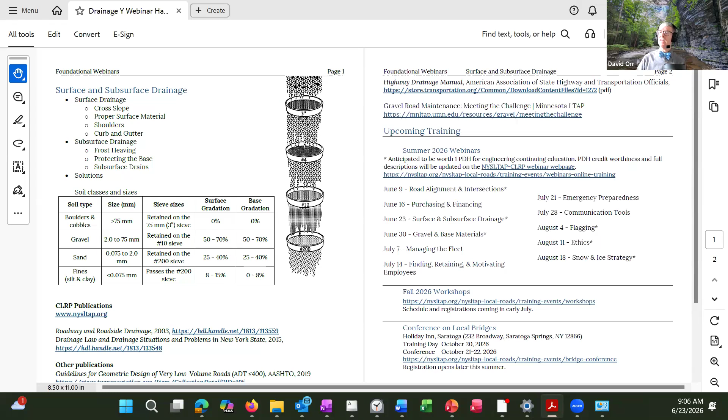But we're trying to maintain roads and streets, and to do that we've got to get rid of the excess water. And that excess water can come in lots of different ways, and worse, it can stay there. So what we're going to talk about today is hopefully solving that problem.

The point is, if you've got excess water due to precipitation of almost any type, you're going to have problems. So you're trying to get rid of the excess water, okay? When all this snow and ice melts, you've got a lot of water to deal with, or the rain we got - we got some great rain yesterday because it was nice and slow and all that fun stuff.

But so we'll go from there. Now, when we have the whole day together, we'll get into a lot more detail. We'll talk about the roadway, the roadside, culverts, erosion, and ditches. We have to break these things up with the webinars - we know the mind can absorb what the seat can endure, so we typically keep them to 1 hour.

So we're going to focus today on the surface water and the subsurface water - how do we get that water out of the roadway if it gets in there, and how do we keep it from getting in there if we can? Hopefully by the end of this hour, you haven't totally graduated, but you've at least got a sense of what kind of work we can do to make drainage better.

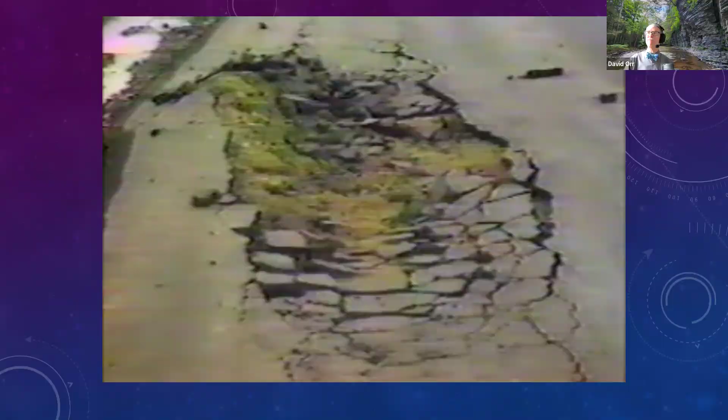So we're going to start by looking at the surface of the roadway. If you look at this particular roadway, this had been bladed or dragged to smooth it up, but they probably were going a little fast with the grader. But the more critical problem is it created a flat spot. You absolutely don't want a flat spot in your roadway, because that water -- the best case scenario is it evaporates, but more likely it slowly permeates into the gravel and saturates it and makes it soft. So you really want to have a cross slope on your roadway.

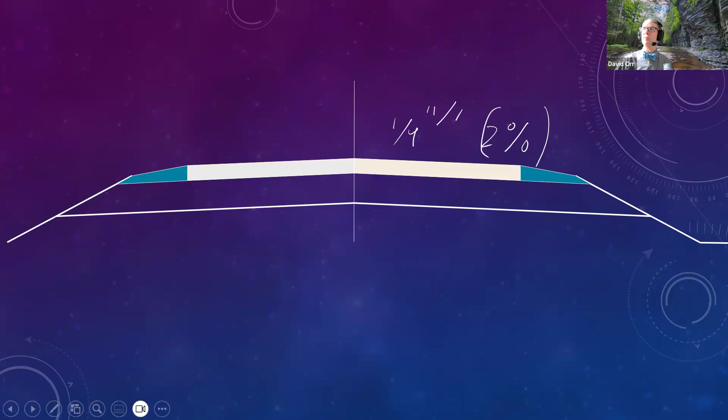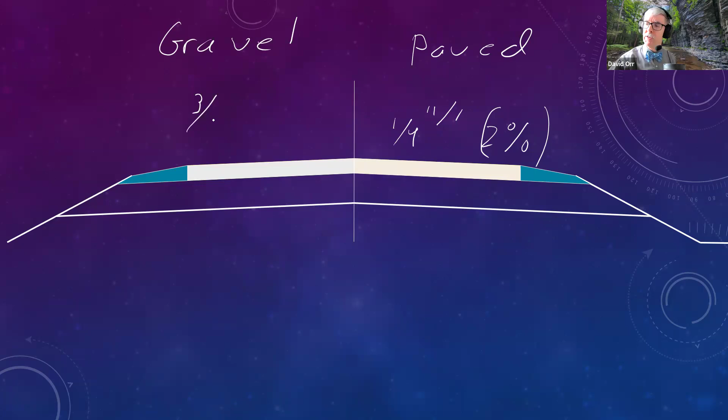That's absolutely key. So if you've got a paved roadway, you want about a quarter inch per foot, which, by the way, is also 2%. Yes, I know they're not exactly the same, but they're so close, don't worry about it. That helps get the water off the roadway. If you've got a gravel road -- I'll even write the word gravel, you'll have to deal with my handwriting and the pen tablet being slow -- if you've got a gravel roadway, it needs to be steeper. It was research that was done here back in the 50s, and typically, if it's a flat stretch of highway, fairly flat, you might need 6% to get a crown.

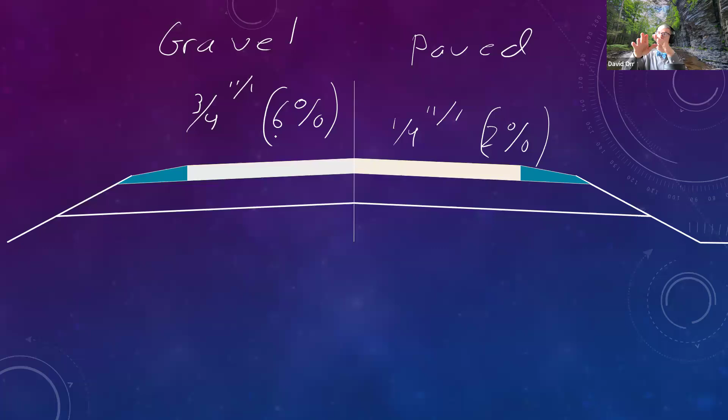In fact, the crown is more critical in a gravel roadway than on a paved one because the surface is more permeable and can be disturbed by all the vehicles going along.

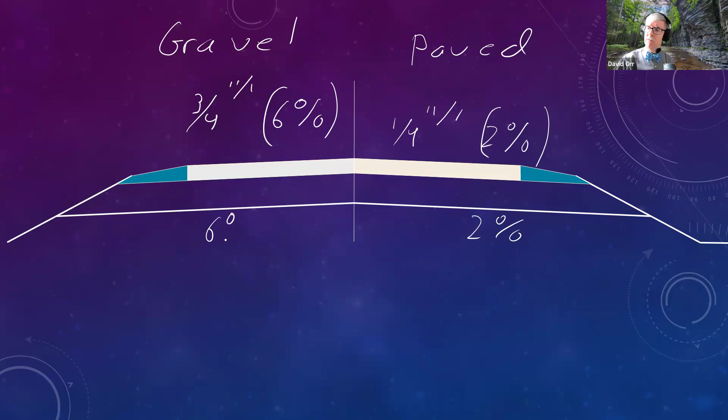If you re-put in a culvert or rebuild a stretch of roadway, what should the cross slope be on the lower layers? Take your upper layer and match it. If it's going to be paved after you're done, put at least 2% in. If it's going to be gravel, put in 6% grades. In other words, do the grading work at the sub-base or subgrade level. It's actually cheaper and easier than placing the other layers since they're consistent thickness, but make sure they drain all the way out.

So if you go down a gravel roadway and notice these big rounded potholes, they're caused by a flat spot. I live on a gravel roadway, and they put in some pavement at one end, creating a flat spot. Now it's just always potholes. People who maintain it throw some gravel in, but it goes right back to potholes. Make sure you get a cross slope.

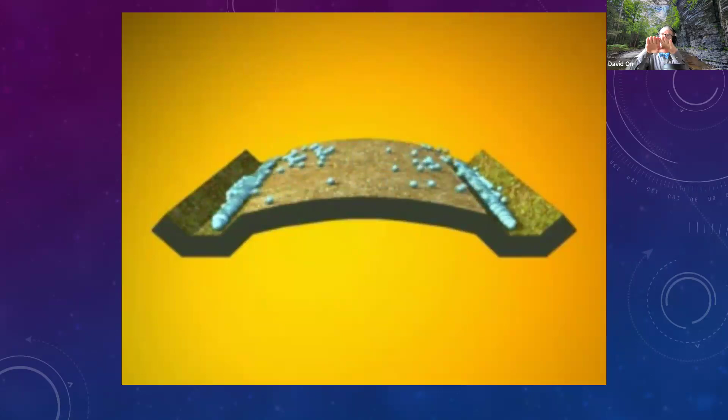We'll see if it plays today. I may stop this one after just a minute, but I'll cut the sound for the sake of argument. This thing talks about the quality of the gravel, roadway shape, and the fact that you've got to get the water off a roadway. It's even more critical on a gravel roadway than a paved one, but it's true on any roadway. You get a flat spot, and actually one thing I don't like about this video is it shows a parabolic surface. If you do that with a gravel roadway, that little flat section with a parabolic shape in the middle actually creates problems. And yes, as they say, it's actually a safety issue in a lot of ways if you get a flat spot.

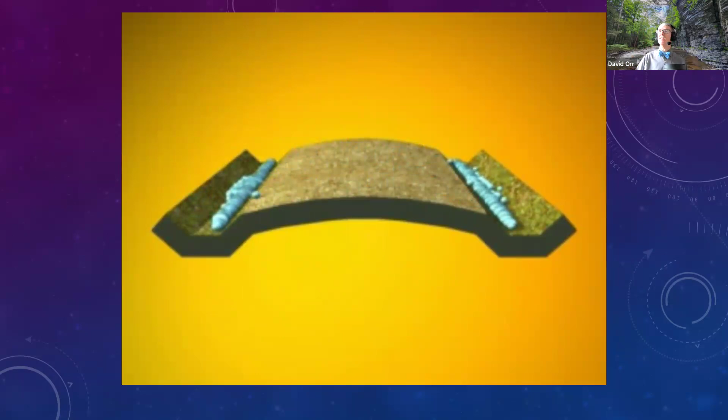And they like a minimum of 4%, but I found, especially with the glacial tills we have, we want to be a little bit more than that on a flat stretch of highway.

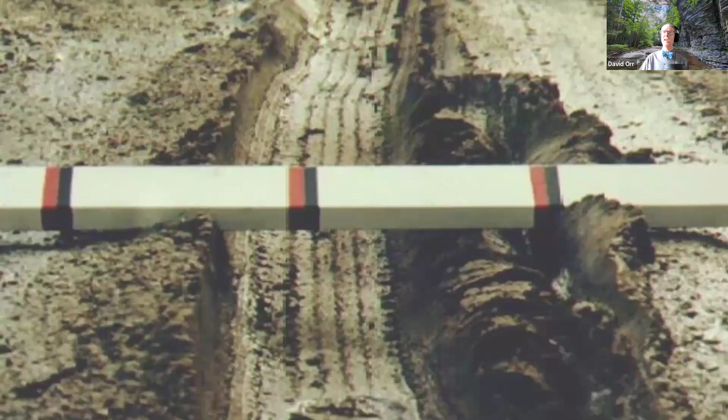Now, here's a case where you could have better cross slope, and no, the cross slope's not very good here, but you've also got to have the right material in the gravel itself. The quality of the material here isn't very good, and here's a close-up of the rut in the lower left corner. You can see it's got nothing going on, no rocks of any size. The largest I found when I put my hand in it was about a quarter of an inch, so it's not very good.

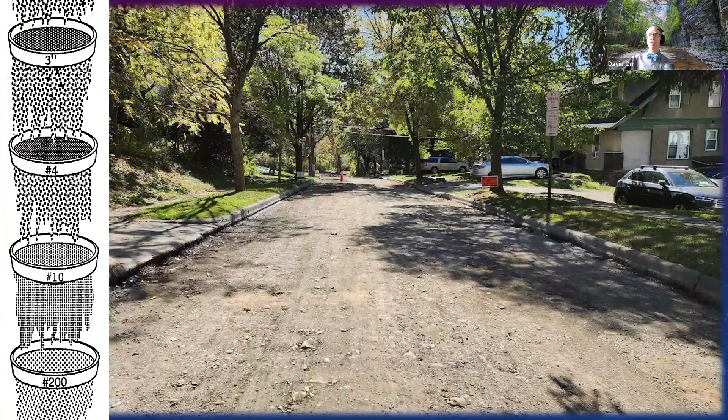Now, before we go too far and talk about what makes a good gravel, we're going to do a lot more on this at next week's webinar, but we're talking about the drainage issues right now. You get a roadway, you're rebuilding it, you've milled off all the surface, and you've got this exposed material.

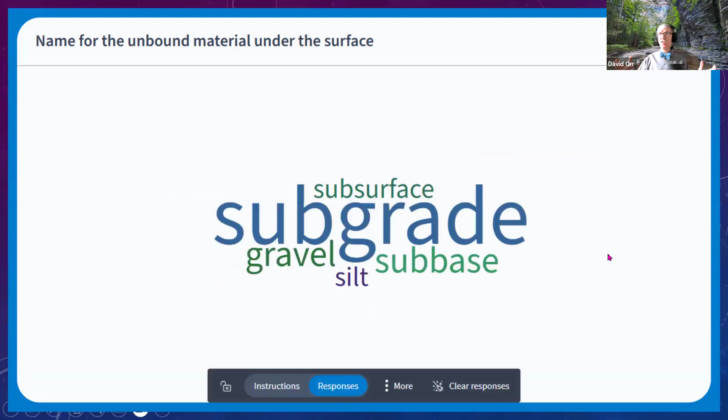So the subgrade is under the roadway, but the material under the pavements is base, subbase, gravel. Now, sometimes when I've asked this question, people call it crusher run, bank run, fill, or base. The point is, whatever it is, it's a mixture of materials we bring in that's part of the road structure.

That's actually a very important part of the road structure. We've got the subgrade, which is the material in the area after we've stripped off the organics - that's what we build the road on. Then we usually have an unbound layer, either base or subbase, which could be a gravel mix, crusher run mix, different materials. Eventually we'll have bound layers above that. Depending how thick your pavement is, you might have a bound base layer or an unbound base layer. Keep these things in mind when we talk about drainage.

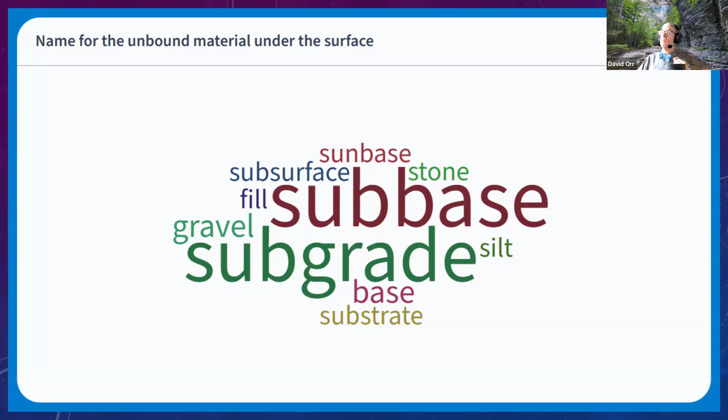But whatever you've got, it turns out some of the same research that talked about the gravel cross slope also looked at the quality of the gravel. Gravel is a mixture of particles of different sizes. It's got gravel-sized particles - essentially pebble-sized and larger. If you want the exact sizes, you can look at some of the handouts. Things smaller than that, down to what you can barely see, we call sand.

Sand is really pretty good for drainage, though the finer sands can have issues. Finally, you get things smaller than 75 microns, or the number 200 sieve - we call those fines, or silt and clay. Here's the key: better quality material has less silt and clay. If we had 2 hours together, we could talk about exactly why, but it comes down to silt and clay holding onto too much water and not letting it through fast enough. There's also a third item called capillarity, which we'll show in just a couple minutes. So you don't want much silt and clay.

But if you've got a gravel surface - and many of you said you do deal with gravel surfaces - you need that silt and clay to bind the gravel together. It's your binder, replacing the asphalt in an asphalt-bound roadway or cement in a concrete surface. So you need a little silt and clay, but not so much it gets soft in the spring. The exact proportions are in the handout, but essentially you need at least 50% gravel, about 25 to 40% sand, and fines content no more than 8%. I'll talk about why in a minute, and a lot more next week.

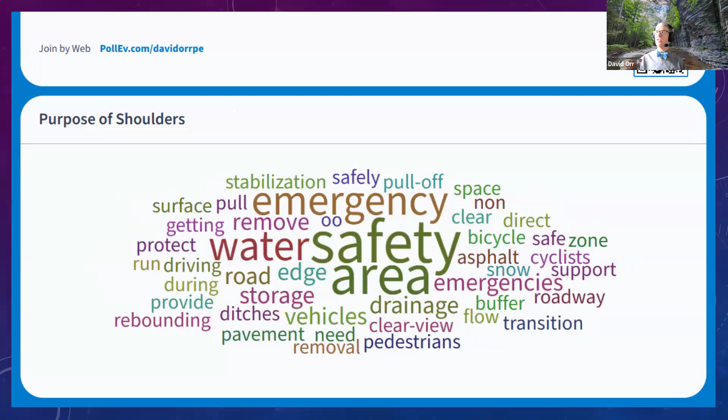It takes care of the water, moves it off the roadway down to the side. It stabilizes the pavement, literally supports it if you've got a compacted shoulder, and helps keep it in. You've all seen cracking on the edge of a roadway where you didn't have good shoulders. That round, D-shaped or edge cracking is caused by lack of lateral support.

And then of course, you're going to have snow and ice issues. You want to be able to store some snow.

So we really need to get the water off the roadway, we need good shoulders. Otherwise we might as well have some ice skaters at night when it refreezes.

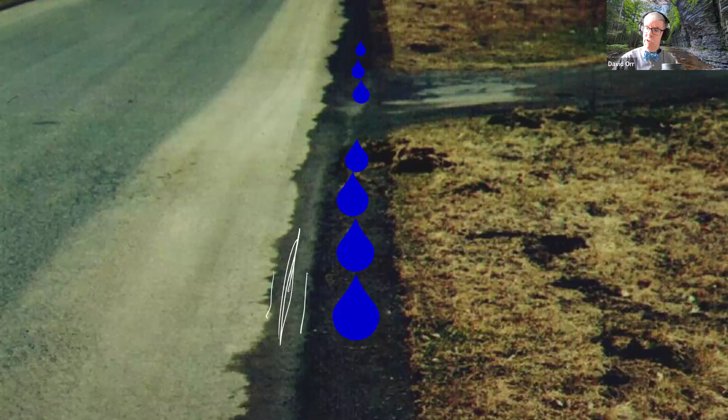That's what happened here—the snowplow doesn't go out far enough, and actually created a spot where the water can get back into the roadway. You can see the edge of the pavement is saturated, and if you look carefully, it's already starting to crack. And of course, that debris thrown out by the plow has to be cleaned up, which leads to phone calls and all that fun stuff.

So take care of the water. Now, many of you showed that you were from urban areas, so you're probably thinking shoulders don't apply—but actually, curb to curb, they do almost exactly the same things.

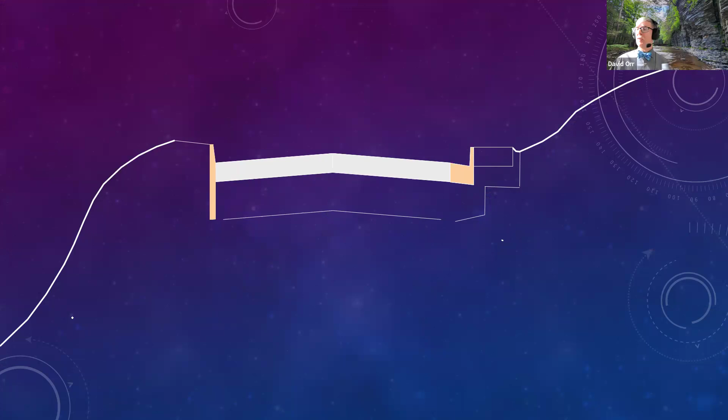They provide lateral support—if the curb has been placed properly, it supports the pavement. And it carries the water, usually through some kind of drainage system, either catch basins in the roadway or side drains, taking the water to your storm sewer system underneath. So it does very similar things.

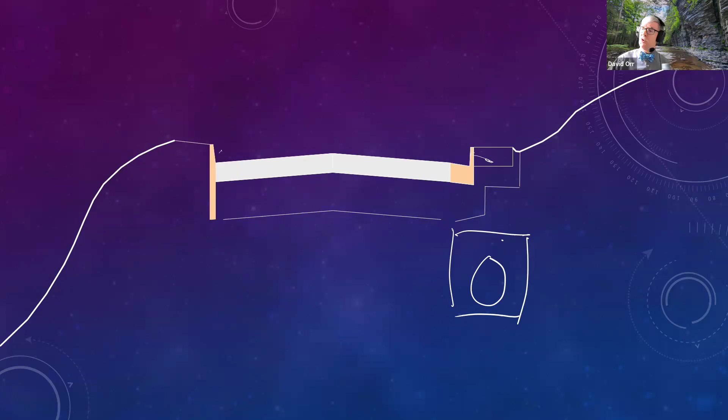It's also a bit of a safety issue. If your curb height is set properly, it provides some safety at relatively low speeds, which is why we typically don't use high curbs on high-speed roadways—hitting one at high speed reverses the safety benefit and actually makes it more dangerous.

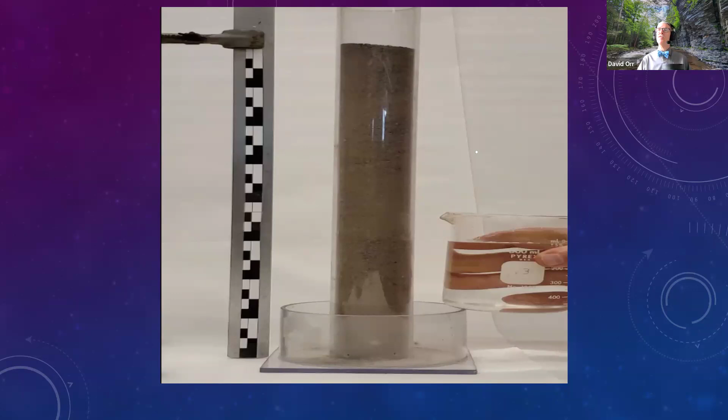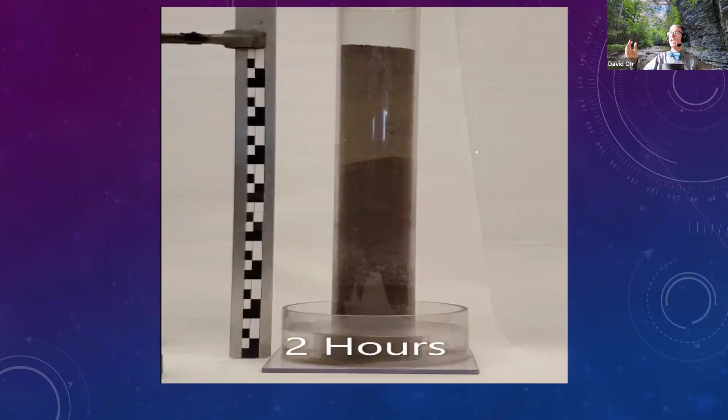We do a longer demo in class, but here's a video. We've got a capillary tube with a reservoir at the bottom, and Nick, who made the video, poured water into the reservoir. There are little holes to let the water in, and you can actually see the water rising up. After 1 hour, it's already up a good 6-7 inches above the water table. So if you've got a water table near the surface, you can literally pull water right into your roadway. After a couple of hours, we're talking about 10 inches or so. If you waited all day, the top of this column would be wet. And that's with sand - if you have silt and clay, it's even higher.

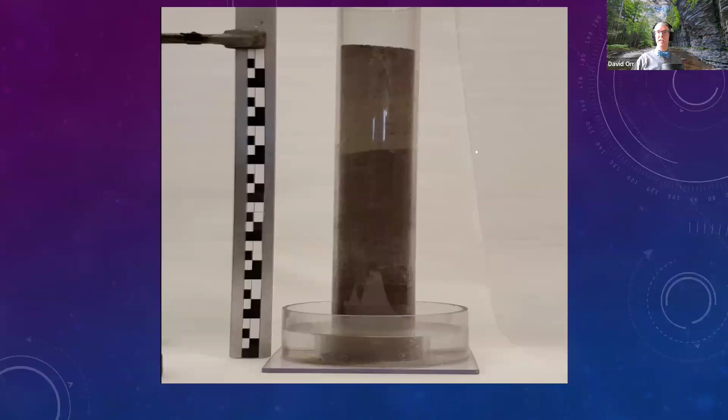And why is this a problem? It has to do with winter. We're going to be brave today and try more videos than I normally do. This is a freezing cabinet, part of a video available on the web called Frost Action in Soils. There's a newer version out there, but the old version works just fine - in fact the video I'll show you is from the old version, because it's such a good video even though it's got old technology in it. The top of the cabinet is below freezing, the bottom is above freezing, but there's a source of water.

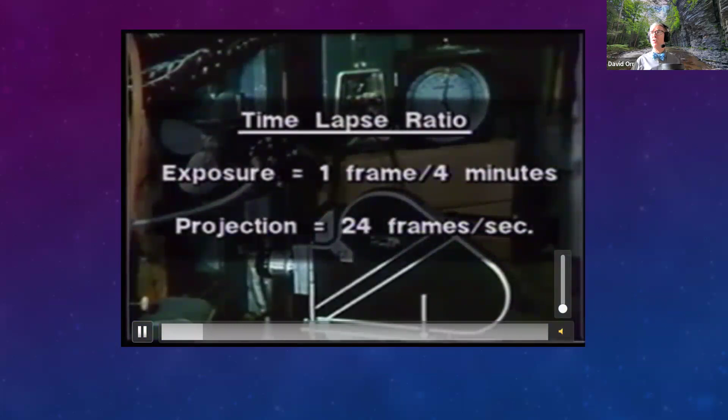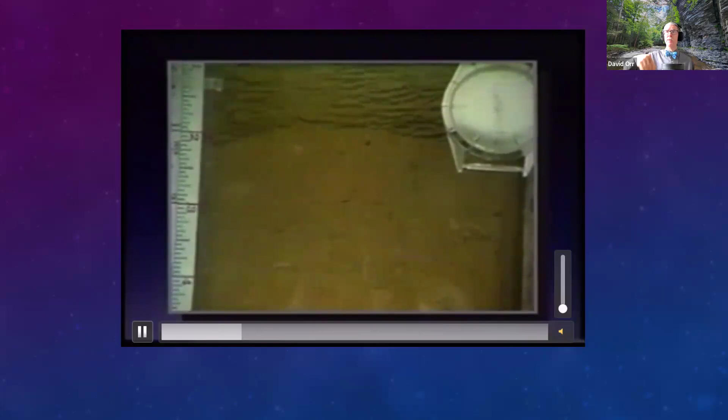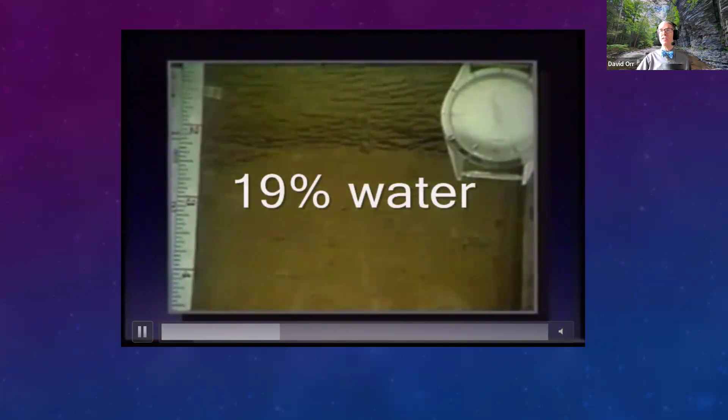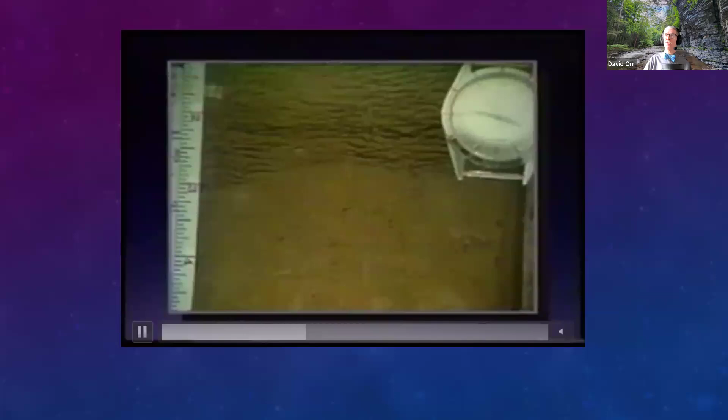This particular sample is silt. It started at 19% water content, and water gets pulled up further. There's about 19% water to start with, but additional water is brought up by capillarity through the soil. As that soil freezes, it picks the roadway up and you get ice lenses. Those ice lenses are hard to stop because the depth of frost can be 2, 3, 4 feet - heck, more in parts of the Adirondacks.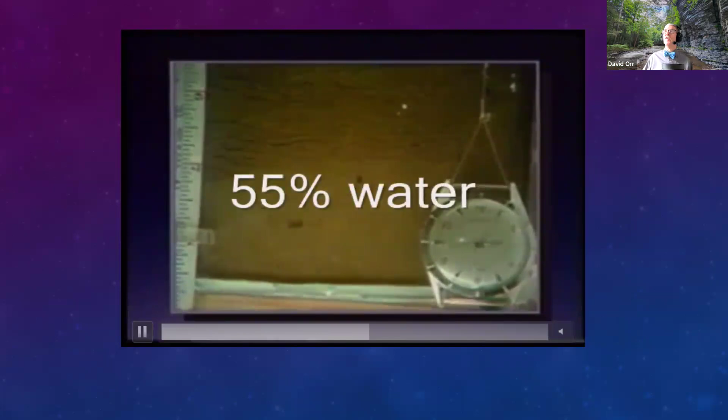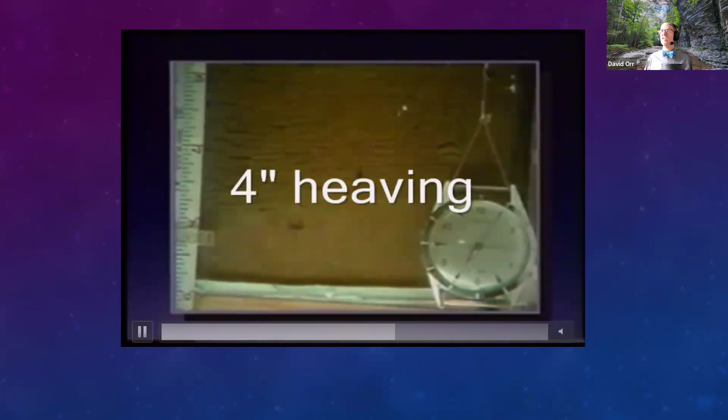You get down to the bottom, started with 19% water content. By the time they got done with this little experiment, it was 55% - over a 35% increase. But even worse, the sample height went from 6 inches to 10 inches. That's a 4-inch heave, a tremendously bad heaving.

So these are things to keep in mind as you're trying to take care of that water. You want to use material that can handle the fact that it's going to freeze. You don't want it to have frost susceptibility, to hold the water. Here's a picture of a lens with 3/4 inch thick ice, and that's pure ice. And that ice is not the water that was already there - it's water that was pulled up by capillarity.

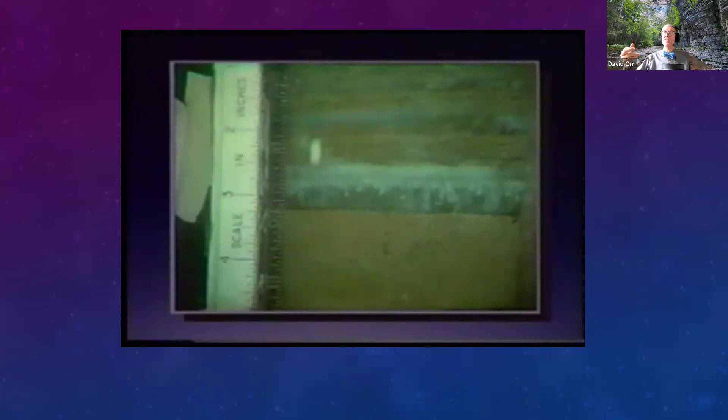Now you could just put up a sign that says frost heaves. That would possibly work, but that's not really the best method to solve the problem. And of course, if the heaving is differential, what you get is a situation where part of the ground moves and other parts don't. Culverts are really notorious for this.

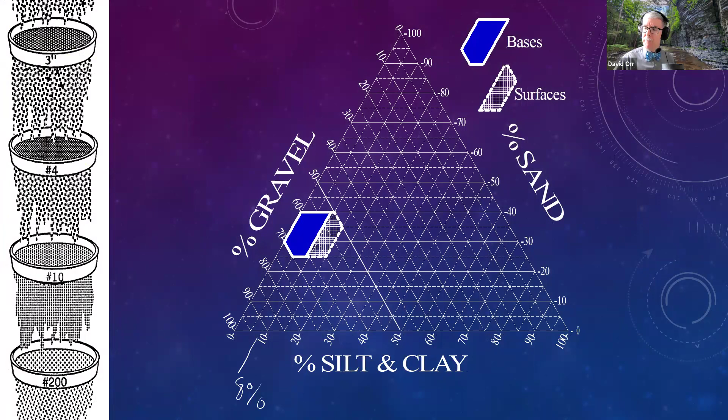So let's look back at our little chart. That's where those lines come into play. That line at 8% fines content we found is the line where the frost susceptibility starts to come into play. So you want your fines content to be less than 8% to reduce the frost issues that you have to deal with, and it will drain better.

In fact, truth be told, if you're on a really thin surfaced roadway, you actually need better gravel than someone with a thick surfaced roadway, because the consequences of the excess water will make your problems worse.

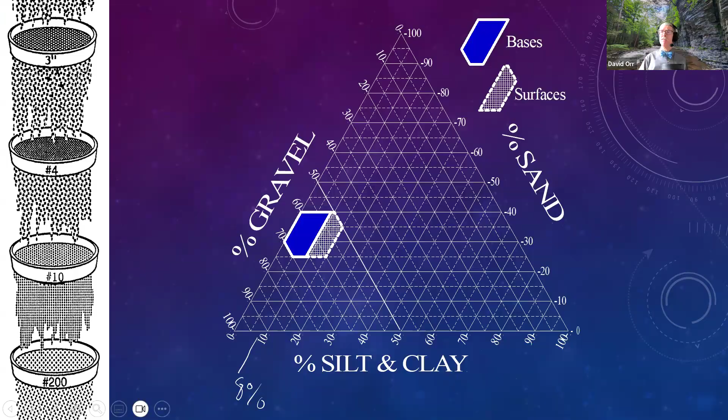It's either trapped in there, coming up via capillarity, could be a spring in the area. You're going down a hill, so it could be that. But don't pour your money into the surface in this case - think about the quality of the material underneath.

Now, good news I have for you, by the way, is in the middle of the winter, when the pavement is frozen, it's as strong as it can possibly be. That's really cool, that's great news, right? We're in good shape. However, the problem is, of course, it thaws a little bit from the bottom, but a lot from the top, mainly in the middle where the sun hits the black surface on a paved roadway.

And of course, we have shoulder material that may be of different quality, and so we get a thawing in the middle. And of course, all that extra water - remember, 18, 19% water to 55% - all that water doesn't have anywhere to go, and so you get a big water bed and a bathtub.

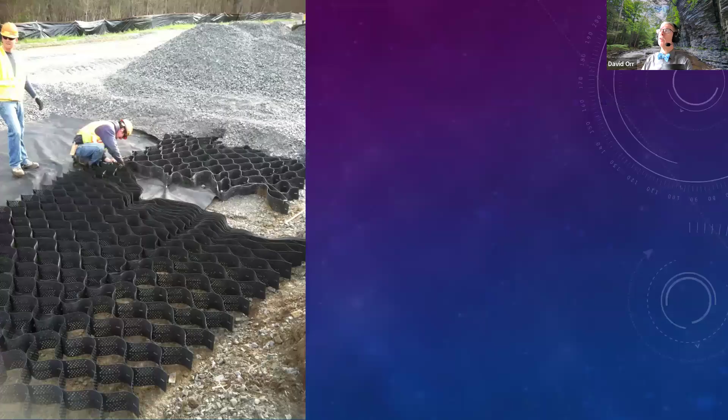Now, if you're in a really soft, swampy area, you might think about putting down fabrics or geocells or other tools to help spread the load out over a really soft subgrade. But again, make sure you understand what these things do for you and don't do for you, and what is the effect of excess water.

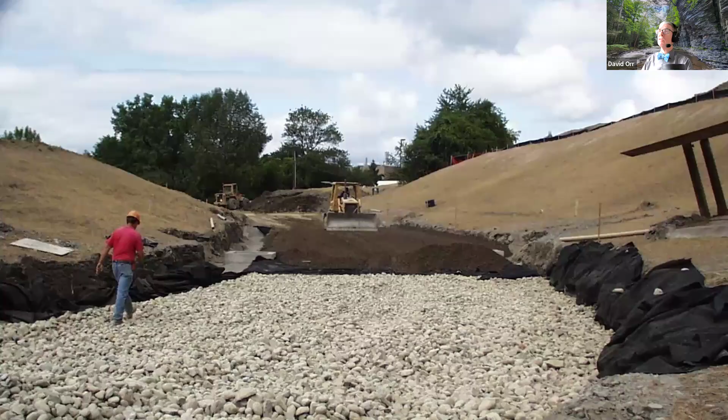In this particular case, all those rounded rocks, you can't compact them. And if you can't compact them, traffic will eventually do it, but it takes a while, and you can get rutting and other kinds of problems.

So think about the subsurface water, try to keep it out of the roadway. And if you can't get it out, think about subsurface drains and blankets and stuff like that to take it away. If we had a whole workshop, we could talk about ways to do that.

Now, I'm a big fan of fabrics, but make sure you're using the right fabric and understand the limitations. Not every fabric works in every situation. And you don't want the fabric to fail prematurely because now you've got to dig it back up, and fabric does not dig up very well. So try to use it judiciously where it's needed.

If you've got excess water in the spring, short term you can think about putting in subsurface drains. Long term, I'd think about free draining layers. Make sure the base material is good quality - we'll talk more about that next week in our webinar on base and gravel materials. But you want to get that water away from the roadway and reduce the amount of time it sits there causing your pavement to be weak.

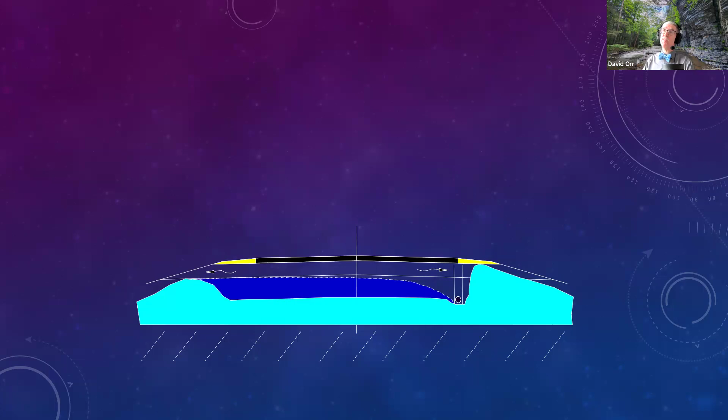One of the things we see around New York State is most of our roads are pretty old. Here's a picture from the 1908 Book of Roads from the Department of Public Works of New York, describing this as a main east-west highway on Long Island. Back then it would have been either what we today call the Sunrise Highway or the Jericho Turnpike.

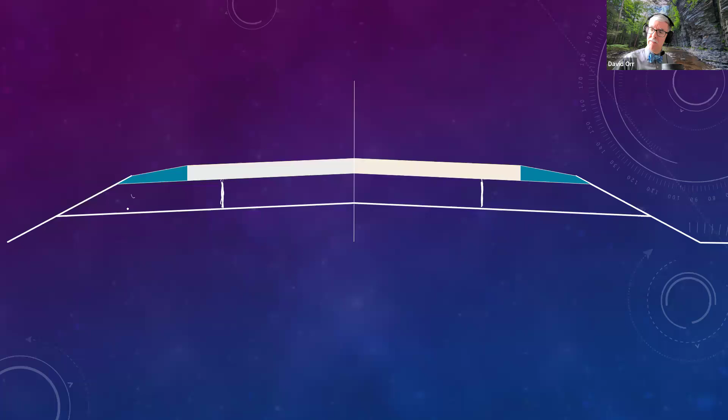They're a little wider than that today. So look at your roadway and think about it - if you've got a roadway with, say, 20 feet of pavement, but the original roadway was only 16 feet, you might have only had good material under the 16 feet. But when they widened it by paving wider, chip sealing wider, and eventually putting cold mix or hot mix on it, the material out here is not good material as a base.

It might be okay as backfill material, but it's trapping water. So all the water can't get out - it's trapped. Even if I put a subsurface drain in here, it doesn't matter. It's not going to drain water out of this base, or at least it'll do it very slowly. So you can have excess water.

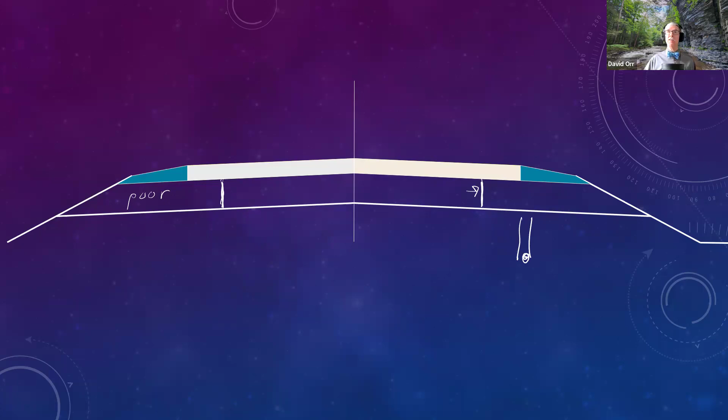How do I know that? Well, look at the roadway - the roadway will tell you. A test pit would be great, but if you can't do that, just look at the roadway. Here's a classic example of this.

Here's a roadway that was not bad, probably had pretty good gravel or base material underneath the main road, but the road wasn't that wide. It was wide enough for a couple of buggies and early cars - didn't need to have that much width. But as we widened it to handle trucks, farming equipment, and industrial equipment, now we've widened that roadway out beyond its structural support.

And you can put a subsurface drain in here. You spend the money and effort to put a subsurface drain over on this edge or the upper edge because you see there's standing water there, but it's not going to pull any water in. You're going to spend a lot of money and not fix the problem.

You've got to get the water away. You're going to have to reconstruct this - probably, as a minimum, box out these whole areas to fix it right. Now, we are big fans of drains, as I said.

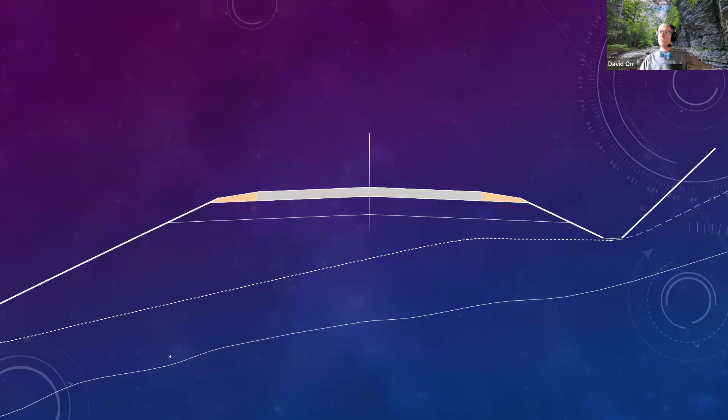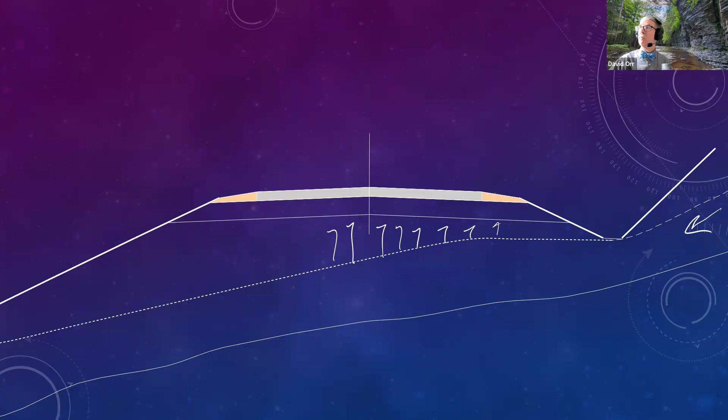They work. They can intercept the water before it gets to the roadway, so you've got water coming in from the side hill. This is a very common problem - we don't live in a flat state. If there's any capillarity, that water can literally be pulled right up into your roadway. A ditch actually helps a little bit, but you don't want to make it too deep because of safety issues. So maybe you come in here and stick a subsurface drain in.

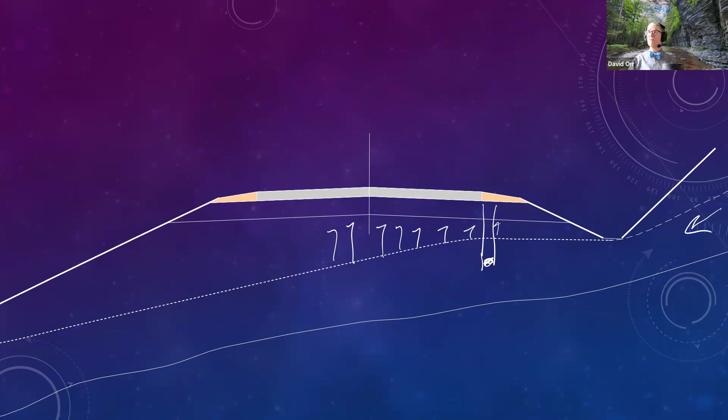That can keep the water from getting to your roadway. And it'd be nice if you could get to an impervious layer, but I'm a realist. I know that's not always possible because you really probably want to go down only 2, 3, or 4 feet at the most. And of course, you have to have a place to take this water.

If your ditch is here and your subsurface drain is down below that, you're going to have to take your subsurface drain across the roadway and out. Actually, it's not that steep. Let's go over here. There we go.

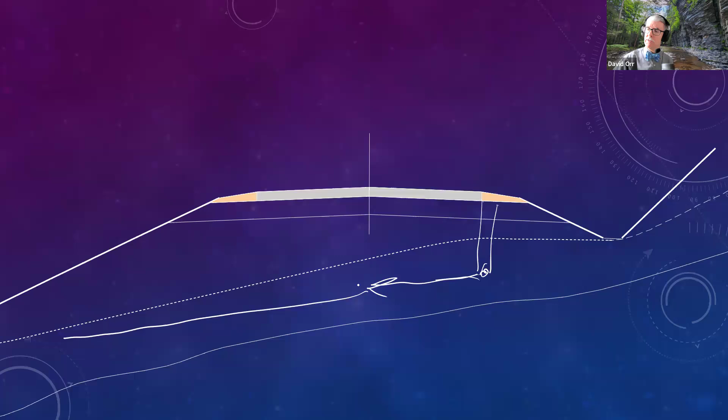So keep that in mind. You've got to be able to get it out. If you have a storm sewer system, because it's a curbed area, you actually could feed it into the storm sewer system. You have to have positive drainage to let the water out of the system.

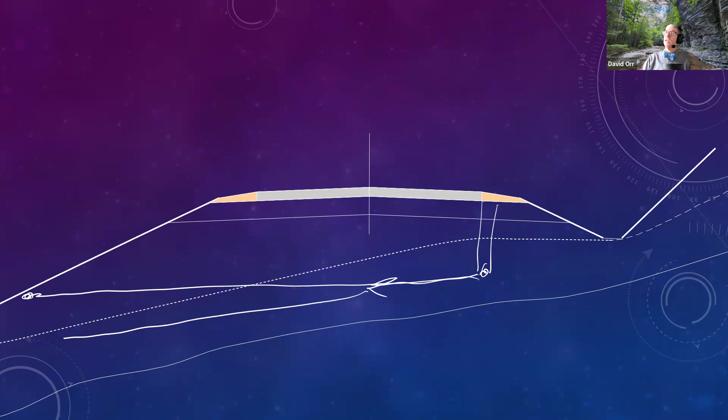Remember, the water that comes out is only the water that would come out via gravity. Now, if you take a sponge and put it into a bath of water and pick it up, it holds a lot of water. The same thing is true with gravel that has too many fines in it. Fines content above 8%, guess what? It holds a little bit too much water. On the surface, they can evaporate, but if they're in a base, they can't. And now in the spring, excess water means premature failure.

So these are all things I want you to keep in mind as we're looking at the drainage of a roadway. And when it comes to your subsurface drains, remember, you're putting a subsurface drain typically at the edge of the pavement because we don't want to disturb the asphalt if we have a paved roadway.

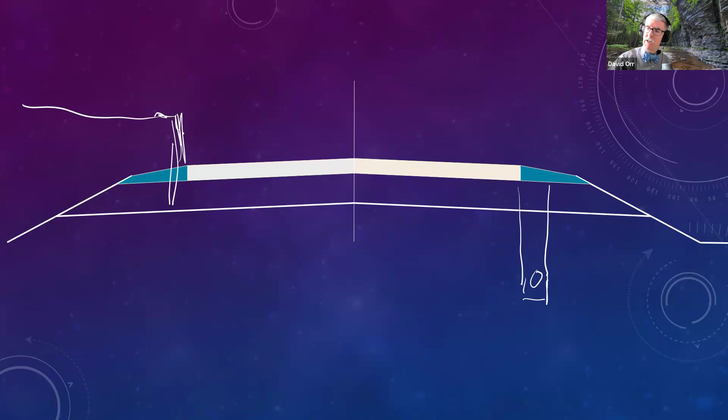If you've got a curb system, say this is a curb here, one of the best times to put in a subsurface drain is actually when you're putting the curbs in. And you can backfill it with sand, which is actually a little easier to compact in that particular case.

The primary thing you're doing with a subsurface drain is you're draining the base. People think you're draining the subgrade. You are to a limited extent, but your primary goal is to keep that pavement structure as dry as you possibly can. You'll get a little bit of drainage from here, but maybe not as much as you might like. So keep that in mind on what you're going to have.

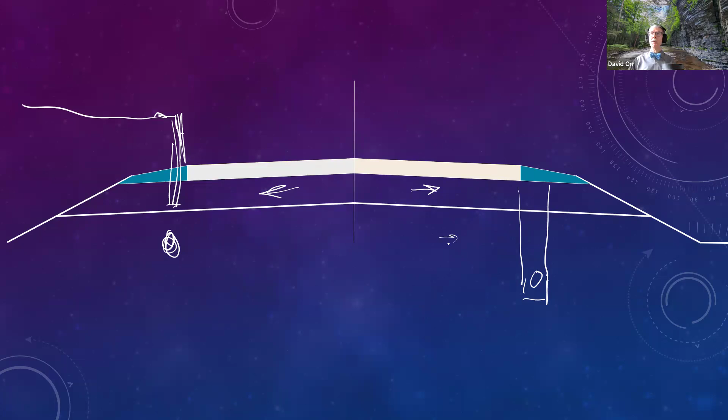And yeah, you could put the subsurface drain in the ditch. That would be fine. And of course, you do have to have a positive outlet. The water does have to get away. Normally, I don't recommend going to the bottom of the ditch line. You want to be up 6 to 12 inches above the bottom of the ditch line because over time, that ditch may silt in and plug up your pipe.

Now, again, we don't have a lot of time together today, but what I want to do is have a little bit of fun. I want you to start thinking about what we've talked about, and let's do some solutions together. So I've got about 5 problems we're going to solve together over the next 10, 15 minutes.

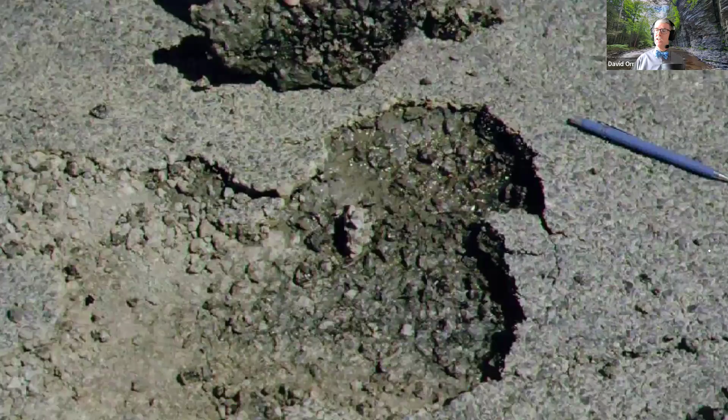We now have a pothole. So we've got a pothole—again, I want you to think short term, not long term. And remember, where's the water coming from? Why is there excess water there? Let's see what you come up with for solutions. You can start putting your solutions in. We'll come back and look at them in just a second—give yourself 30, 40 seconds.

Okay, let's see what you come up with here. Full depth replacement, I see up there in the Q&A. Rebuild, put in an under drain, box it out. Full depth pavement repair, maybe do a pothole patch short term.

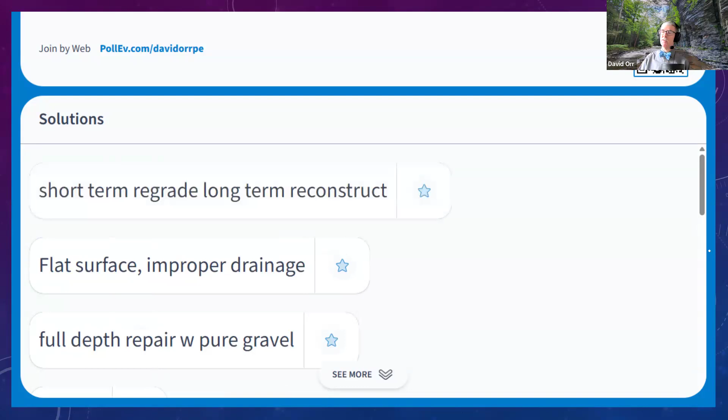Fix the drainage. One thing I'll say is if you've got a roadway that's having problems, a perfect time to take a sample is when it's got problems, when it's been exposed. Take a sample of that material and have it tested, because one test is worth 1,000 expert opinions.

Okay, you need to figure it out. I love this particular picture. I'd actually like a newer version of it, but this one does illustrate a real classic problem.

It depends on why there's excess water, on what solution is going to be the best repair in this particular case. There's two possibilities for excess water in a roadway. It could be that you're in a side hill situation and you've got water coming in from the side, and what you're seeing is the effect of that water popping out through your nice clean base gravel. In that case, a subsurface drain on the uphill side - we'll make the uphill side over here on the right for the sake of argument - you stick a subsurface drain up there, intercept the water, and not all, but a lot of your problems go away because you've intercepted the water.

The other possibility is that the base gravel itself has too many fines above the magic number. Someone in the Q&A wants to tell me what the magic number is for too much fines in base gravel? 8%, very good, yeah. Truth be told, 5% would be even better, but 8%, yeah.

In that case, the solution is to stabilize or clean up - and we'll talk more about that in next week's webinar - the gravel so it has a fines content below 8%, so it doesn't hold on to too much water during the spring thaw period.

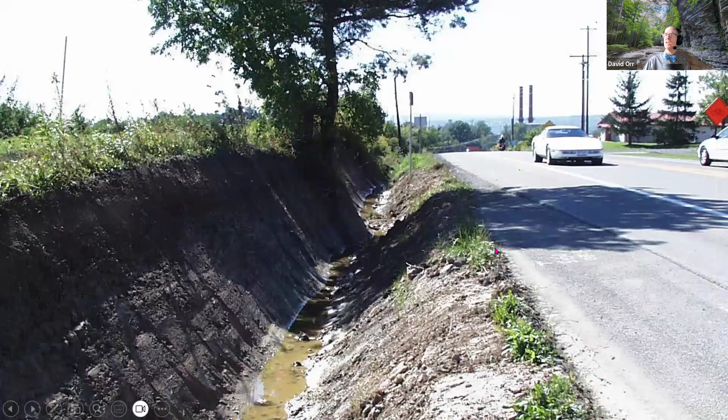Okay, I'm going to clear all the answers one last time. And remember, short-term and long-term and economics all come into play. We're going to do one last one, and it's completely unrelated to what we've talked about, but it's just a reminder how wide the sphere is for drainage issues. I just want you to remind yourself of that.

So what do you think the solution is here for this particular problem? Again, we haven't really talked about it much, but it's a reminder to ourselves that when it comes to road problems, think of the drainage - you're probably going to be in pretty good shape. Guide rails, hydroseed, riprap. Yeah.

What we've done here is we've created a safety problem. We took a ditch that wasn't that deep, and we've made it so deep that people are starting to think about guide rail. We should not have ditches that need guide rail. And somebody put in the Q&A, we need more right of way - and you can guess what the right of way is here, it's the top of that slope.

Really didn't actually need to be that deep. It wasn't really improving things. And of course, all this is eroding away - you're losing material at the rate of tons per mile per year. The tree survived, by the way, and eventually they piped this whole thing in. They made a storm sewer system out of it, essentially. Very expensive repair. But just as a reminder, there's lots of other things out there when it comes to drainage.